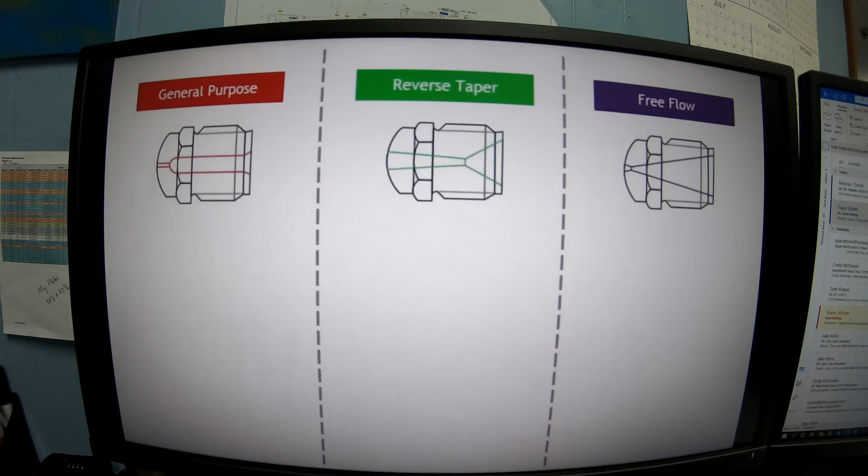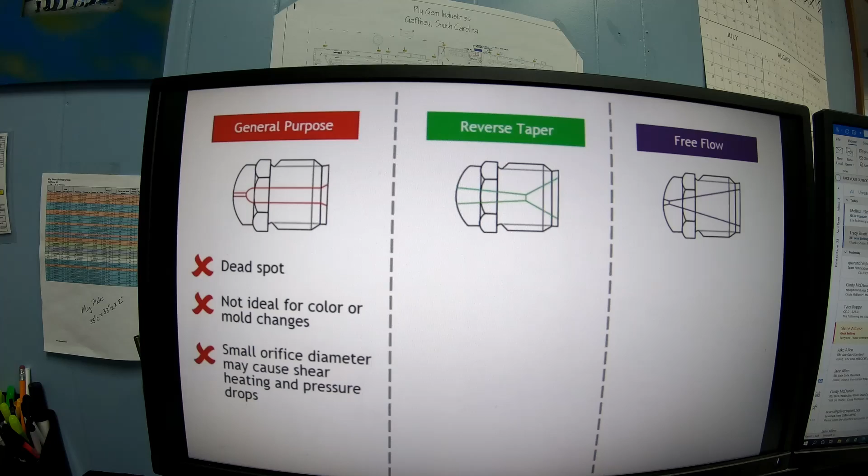Comparing the three designs, there are advantages and disadvantages to using each. The general purpose nozzle tip can have a dead spot that could alter material properties and potentially create molding challenges. This design choice may not be ideal when frequent color or mold changes are required. Lastly, the small orifice diameter and long land length could cause high shear heating and big pressure drops.

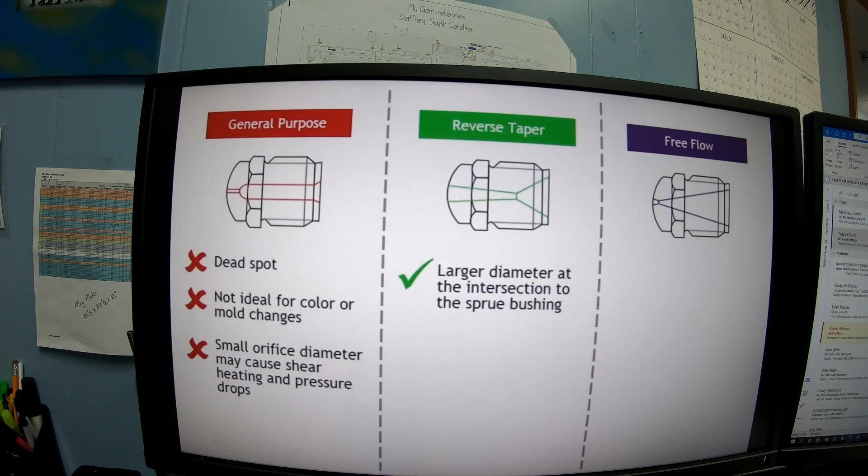The reverse taper nozzle design has a larger diameter at the intersection to the sprue bushing, so it won't freeze as quickly as the general purpose design. The design requires the sprue to be partially pulled out of the nozzle tip by breaking at the thinnest section. This is a challenging process that is highly dependent on the temperature behavior of the nozzle tip.

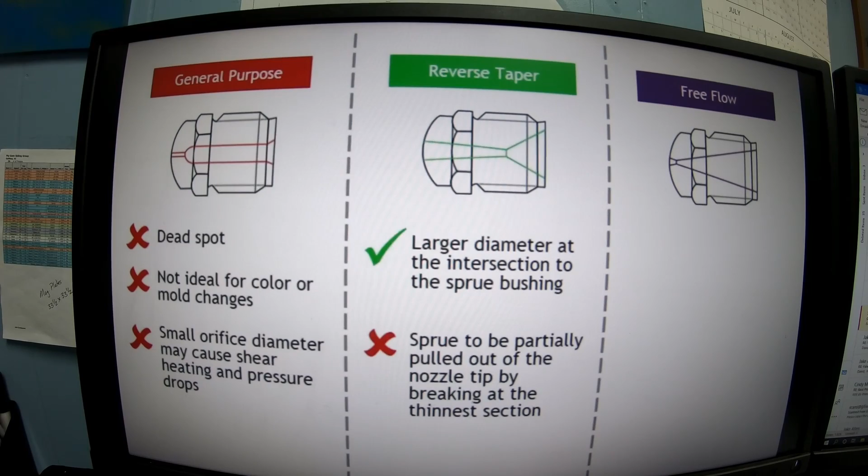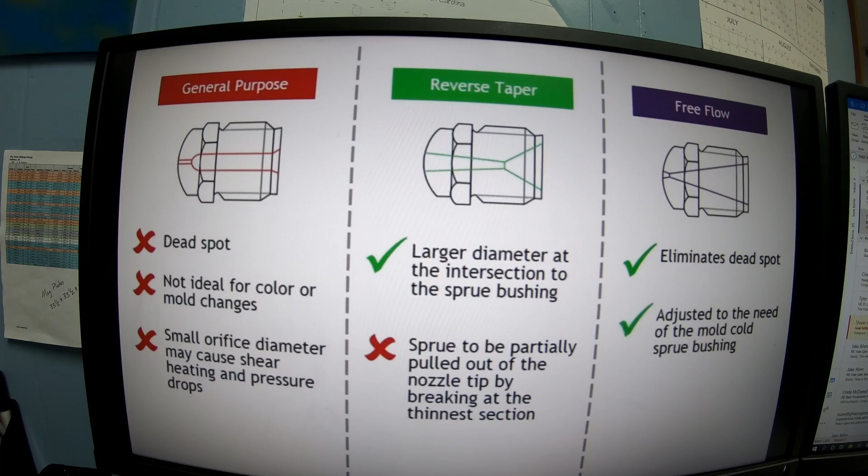The free flow tip is a good alternative to the general purpose nozzle because the free flow internal design eliminates the potential dead spot. The orifice can also be adjusted to the need of the mold cold sprue bushing. Although opening the free flow nozzle will allow the material to drool out, the increased land length will counter this effect.

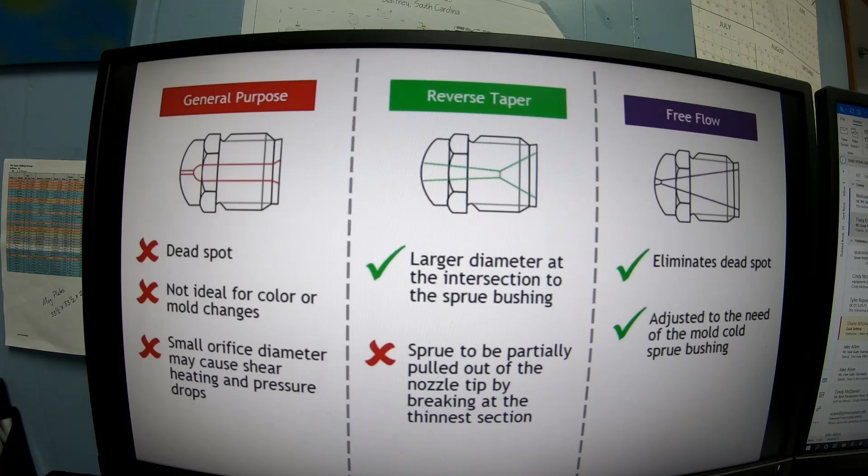Okay, so this would be a shut-off nozzle. A lot of companies are using this style of nozzle to help with drool and stuff.

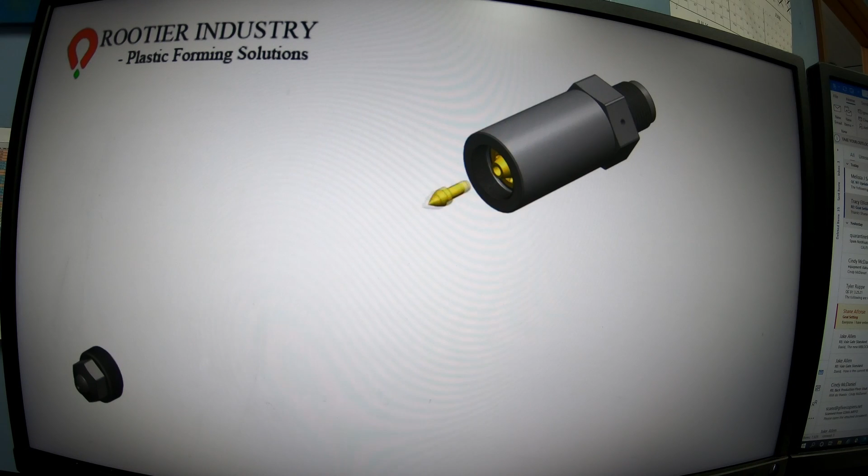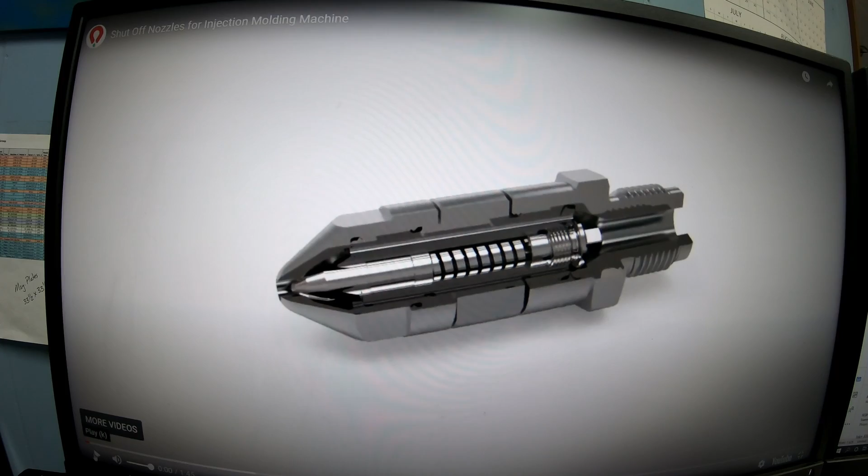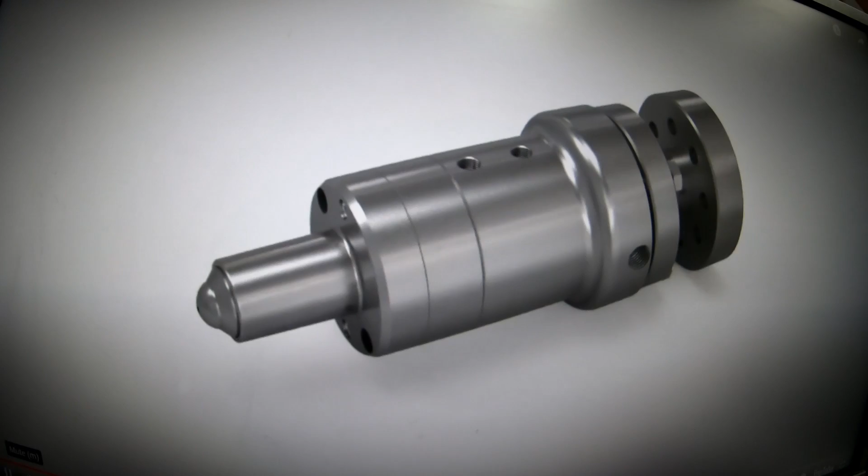I wanted to show you guys this. So these are different nozzle tips that have spring-loaded stuff in them to where they're a shut-off tip. So they're a little different. These are some of the new ideas that a lot of people have come up with. So they got a spring in that one. This one's got like a plunger system on it.

This one has the thing where it shuts it off. So what happens is it goes forward and shuts the material off so it doesn't drool out into the machine. Same concept, just a little bit different design.

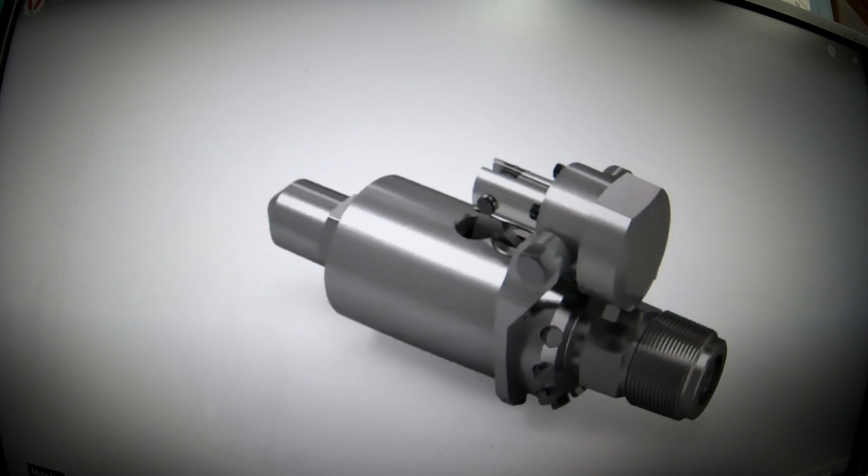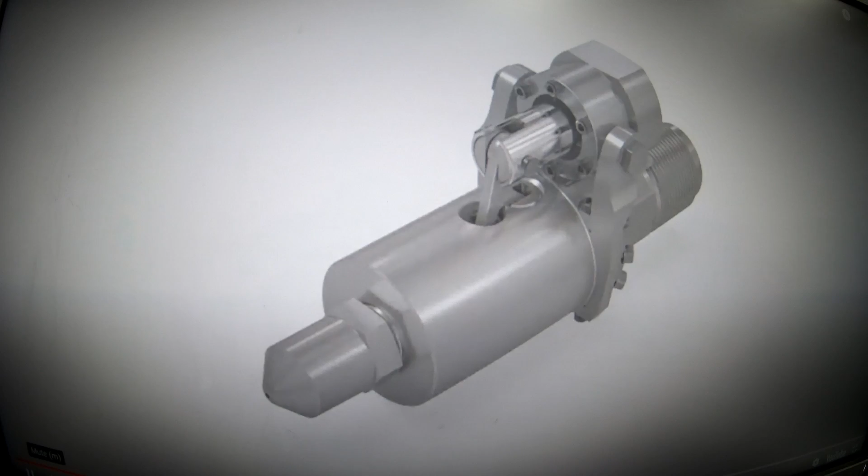Now some of these right here have different kinds of plungers inside of them. This one's like a mixing one because it's got the little grooves inside of there. So this one you could use to mix colors with, see it? That's like a filter inside there to help it with mixing and stuff.

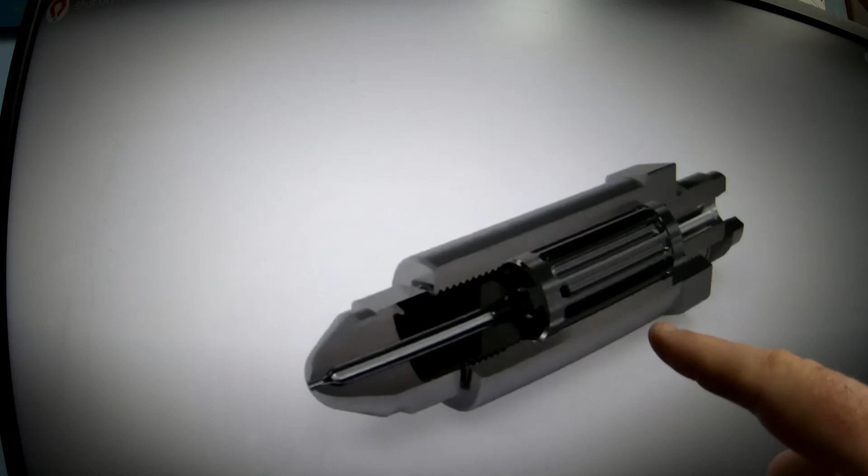Now at a place I used to work at, we used to use this next style. We used to use this style all the time right there. And material would flow through there and help you mix. So I hope you guys enjoyed this part of the video.

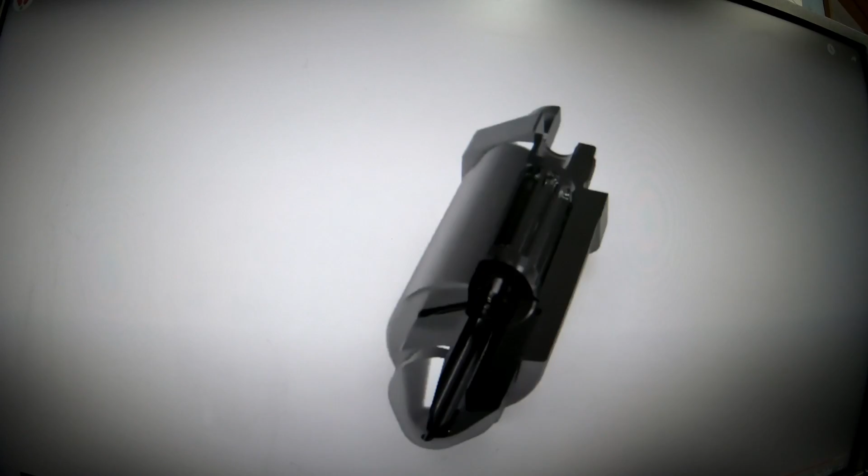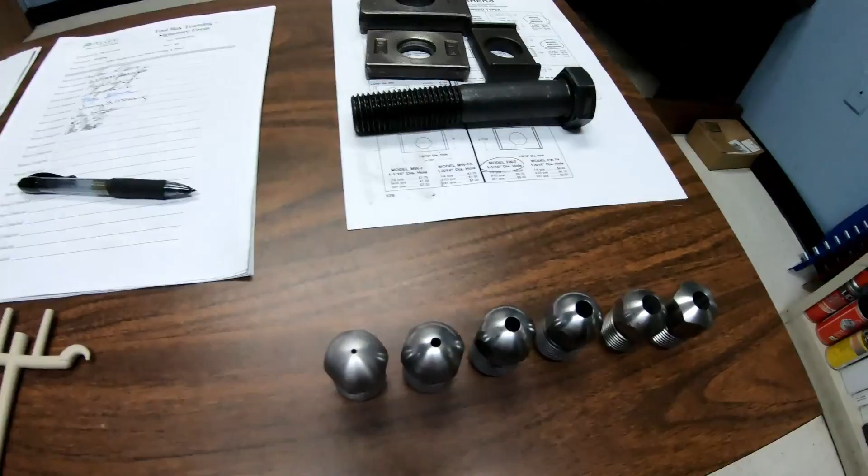Okay guys, I hope you enjoyed a little bit of the videos. Okay, so what I wanted to show you is, let me pull the camera over here. So here's some nozzle tips. So you have the different size tips here. You can see these are all general purpose tips. They're straight through tips. You can see straight through.

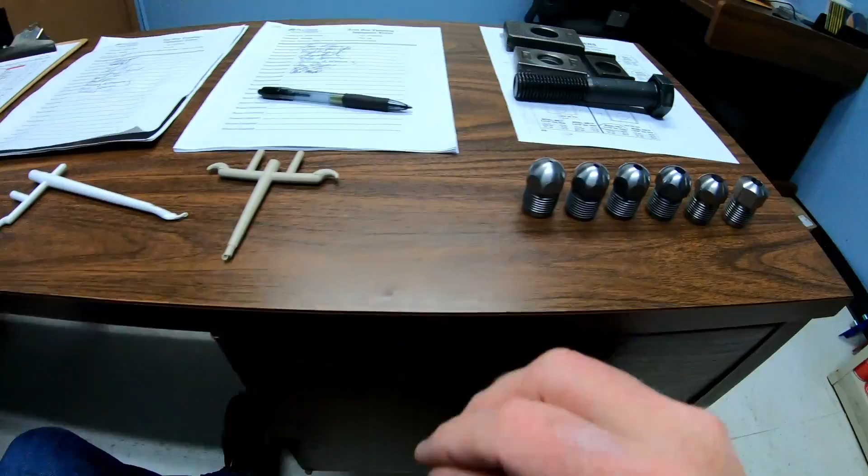So what we use here the most of is general purpose tips. We don't use reverse nylon tips or anything like that. I wanted to show you this is a runner, and you can see the end of the runner's not right.

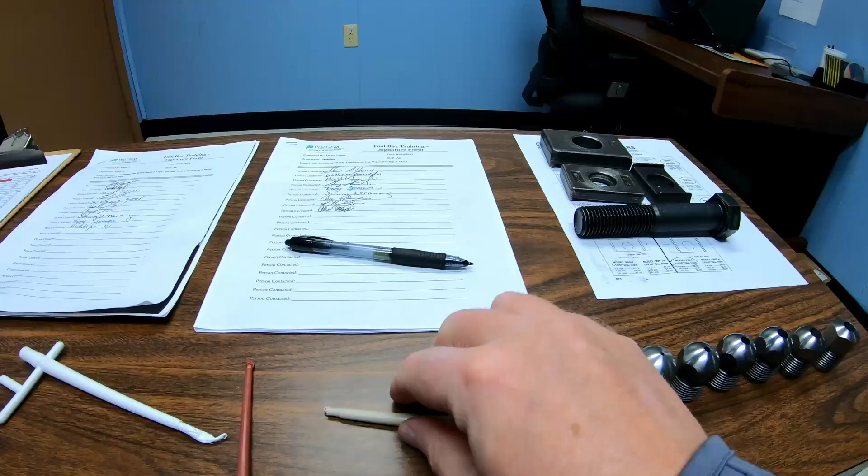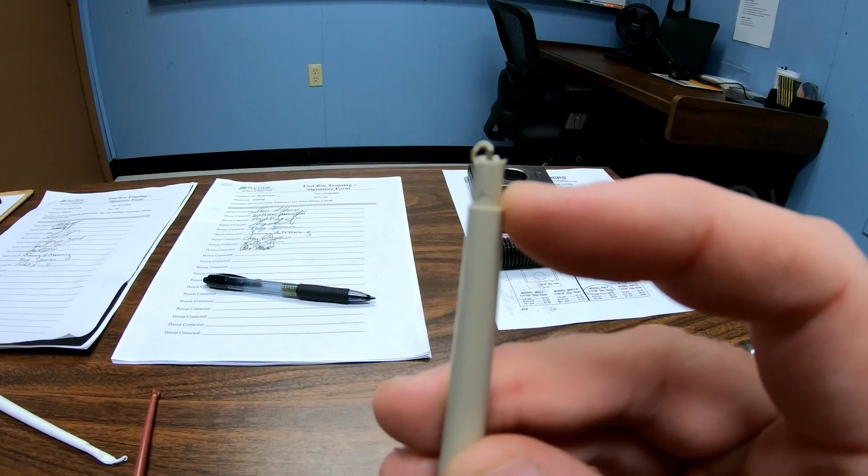You can see how this part of it is. What you're trying to achieve is something like this. So you always want to go one size smaller than the hole on the back of the sprue bushing. So on the back of the mold, you always want to go one size smaller.

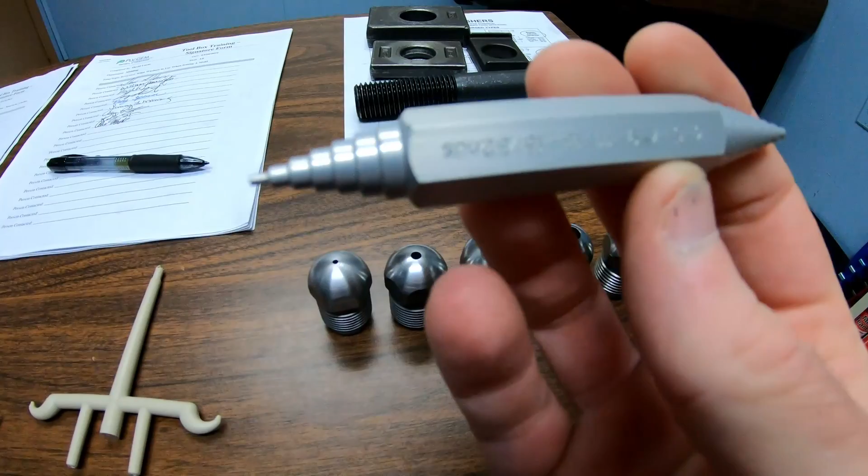They make little gauges that you could use to actually check that. I have one actually right here. Let me see. So they have these little gauges that you could use. Oops, sorry. So what you'd have is something like this. What you'd do is you'd measure the back of the sprue bushing, and then you'd put it in these and find out what size that is, and it'd tell you exactly what size you're using. So you could use that, and you can easily get them through DME. They sell them, they're cheap as heck, like $1 or something.

But your goal is to try to get your nozzle tip to where you're one size smaller all the time than what you have. Now, if you go way too small, your pressures are going to be really, really high. So you don't want that. So the goal is to try to get your nozzle tip to be one size smaller than what the sprue bushing is on the back of the mold. If you don't, and you go too small, you're going to have higher pressures, which will mess you up.

Now, if you go too big, what will happen is you'll shear. So you're hitting land around the sprue bushing, a little bit of the metal, and it'll shear right there. So you'll end up getting burn marks, streaks, stuff like that on your parts, and you don't want that. So you want to try to eliminate that by doing this with your nozzle tips. If you don't, you can actually create issues that you don't even realize with your nozzle tip.

And everybody knows how to change the nozzle tip. It's pretty simple. You go in, you pull the mold, and you get a 7/8 wrench, which is the wrench we use most of the time, like this. You'll use gloves, heat sleeves, safety glasses, you'll have all your PPE on. You'll take this wrench and break it loose. Sometimes you can run it through the platen and actually break it loose that way too. Then you take it off and clean it real good.

All right, guys, my damn GoPro shut off. I don't know what happened, but I just wanted you guys to see the nozzle tips and see how they actually work. A lot of people don't understand how that affects the molding cycle or molding process of a press. So always double check your nozzle tips.